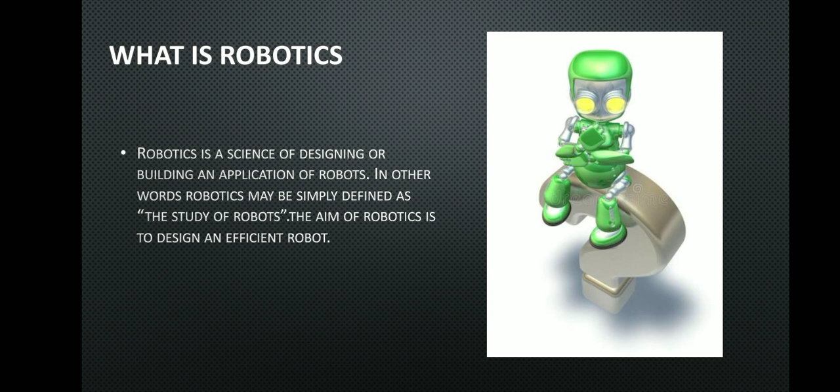Let us see the next topic: introduction to robotics. Nowadays, robots have become a subject of great interest. In fact, robots are defined as man-made mechanical devices. In our imagination, a robot is a machine that looks and acts like a human being. Robots can move and do anything like us, and this activity should be controlled and monitored by us, and the behaviors can be influenced into robots by programming, where the commands or tasks we want done are programmed into a robot.

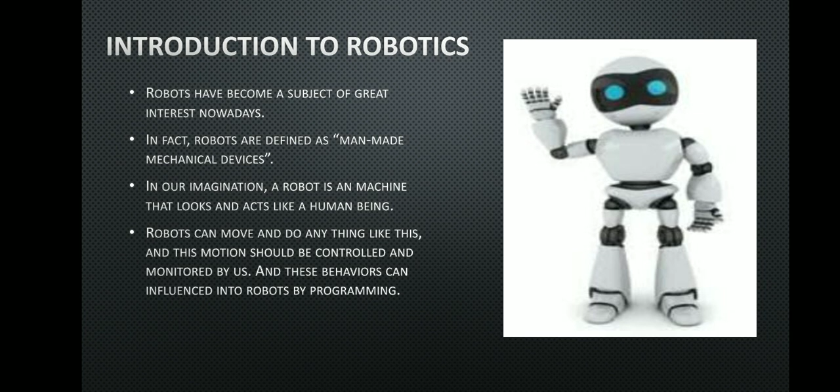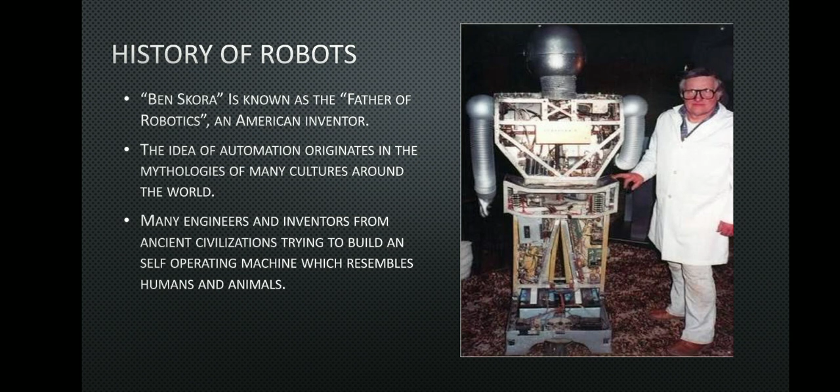Let me move on to the next topic, history of robots. Ben Skora, an American inventor, is known as the father of robotics. The idea of automation originates in the mythologies of many cultures around the world. From ancient times itself, many engineers and inventors have tried to build a self-operating machine, known as a robot, which would resemble a human or animal. I have attached the image of Ben Skora with his invented robot.

The word was first pronounced as 'robot', and then in the late 50s it softened with a U and was pronounced 'robut'. In the 60s it softened with an O and was pronounced 'roboht', and then in the 70s it was once again pronounced as 'robut'.

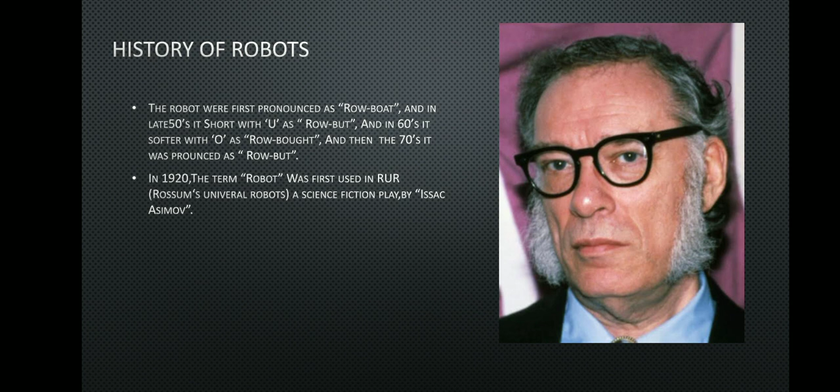In the year 1920, the term robot was first used in RUR, Rossum's Universal Robots, a science fiction play. It was first termed by an inventor called Isaac Asimov — Mr. Isaac Asimov, who coined the word robot.

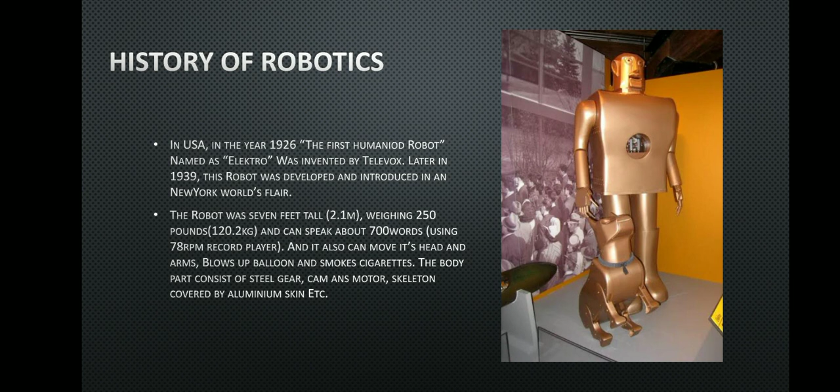In the year 1926, the first humanoid robot, named Elektro, was invented by Televox. Later, in 1939, this robot was developed and introduced at the New York World's Fair. The robot was 7 feet tall — that is 2.1 meters — and weighed 250 pounds, about 120.2 kg, and could speak up to 700 words using a 78 RPM record player. It could also move its head and arms, rotating its head and moving its arms up and down, and it could blow up balloons and smoke cigarettes. Its body consisted of a steel gear, cam, and motor, and the skeleton was covered by an aluminum skin. This is the image of the robot Elektro.

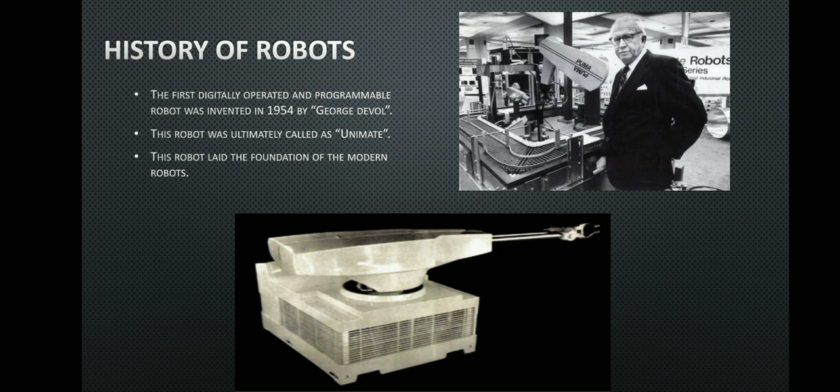The first digitally operated and programmable robot was invented in 1954 by George Devol. The robot was ultimately known as Unimate, named so because this robot laid the foundation for modern and future developing robots. This is Mr. George Devol with his invention named Unimate, and I have attached the image of Unimate separately here.

Moving on to the next topic, laws of robots. As humans, we have certain laws and regulations to be followed. Similarly, robots too have some laws, proposed by Isaac Asimov. As we said in the earlier slide, the term robot was introduced by Isaac Asimov — he is also the man who proposed the laws for robots.

The first law says a robot may not injure a human being or, through inaction, allow a human being to come to harm, unless this would violate a higher order law. The second law states that a robot must obey orders given to it by human beings, except where such orders would conflict with a higher order law. The third law states that a robot must protect its own existence, as long as such protection does not conflict with a higher order law.

After proposing these three laws, Isaac Asimov later added another law known as the zeroth law. The zeroth law states that a robot may not injure humanity or, through inaction, allow humanity to come to harm.

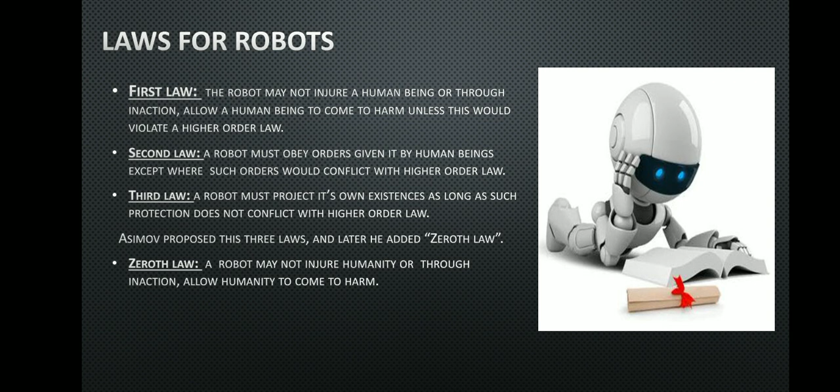Moving on to the next topic: is robotics necessary? Before getting into the topic, do you think that robots are necessary for us?

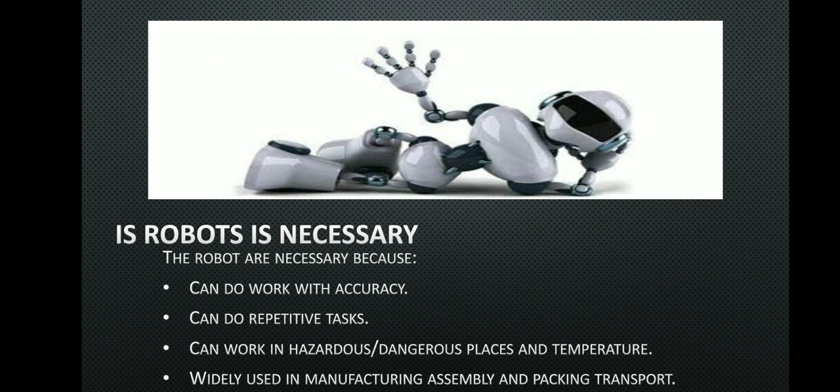Robots are necessary for us in many ways. Coming back to this topic, robots are necessary because they can do work with accuracy, they can do repetitive tasks, work in hazardous and dangerous places and temperatures where a human can't, and robots are widely used in manufacturing, assembly, and packing transport.

Moving on to the next slide. As I said in the previous topic, robots are necessary in many different ways. These different ways are taken as 5D considerations for robots: dangerous, dirty, dull, dexterous, domestic.

Let's first see dangerous: defusing bombs, mining, and space exploration. These are the places where robots are used, because if humans go there, there's no assurance for their lives.

And dirty: spraying paints and unblocking sewage and drainage pipes. Spraying toxic paints affects our skin and health, so robots can be used.

Dull: factory line work and heavy stocking jobs. If a man works more than 7 or 8 hours per day, he would become dull and can't work well. But if a robot does that, it works with the same speed and accuracy till the end without becoming tired.

Dexterous: surgical jobs and nanobots. This dexterous work should be done with a high level of accuracy where humans can't, so robots can be used in those places.

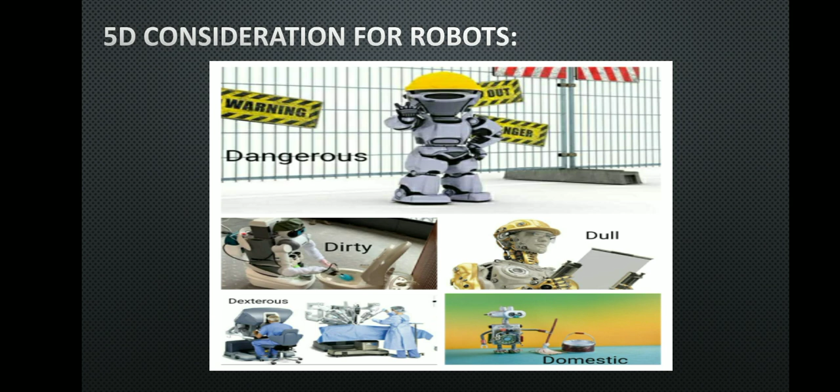And domestic: all household works come under the domestic category. In the next slide, you can see images for the previously discussed topic.

Moving on to the next topic, types of robots. Robots are of five types: pre-programmable robot, humanoid robot, autonomous robot, teleoperated robot, and augmenting robot.

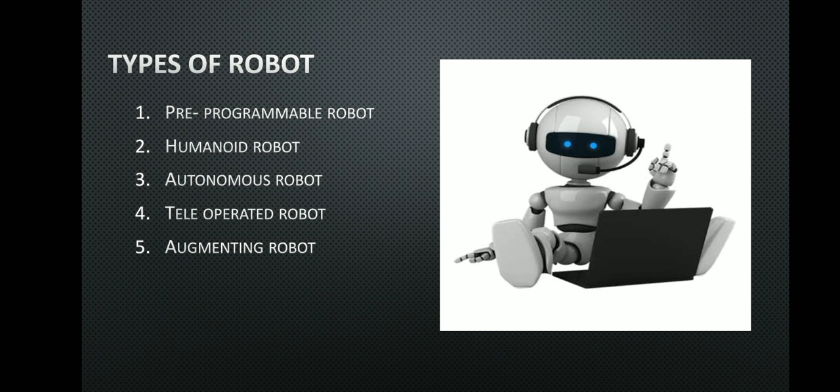Moving on to the next topic, applications of robots. Robots are used to work together in many fields like robotic painting, robotic welding, robotic assembly, part transfer, and machine tending, etc.

Robotic painting makes work easy for professional painters dealing with toxic materials, because it is very harmful to our skin and health, so robots can be used there.

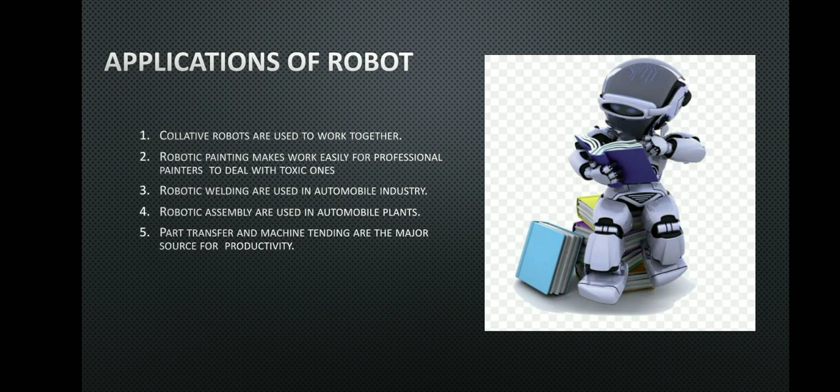Robotic welding is used in automobile industries, and robotic assembly is used in automobile plants. Part transfer and machine tending are major sources of productivity.

Let me move on to the next topic, advantages of robots. Robots are useful in many ways: safety, speed, perfection, etc. First, let us see about safety.

It's the most important advantage of utilizing robots, because robots will handle things very safely in their surroundings, etc.

Speed: robots do not get distracted and complete the work on or before the deadline. They do not get distracted or tired, and work with the same speed till the end, which is an advantage for a robot.

Then perfection: robots do the work with accuracy, at a high level where a human can't. Robots are known as happier employees in the sense that they need not worry about salary, do not get tired, and do not take breaks in between. They can work longer hours than humans without even taking breaks.

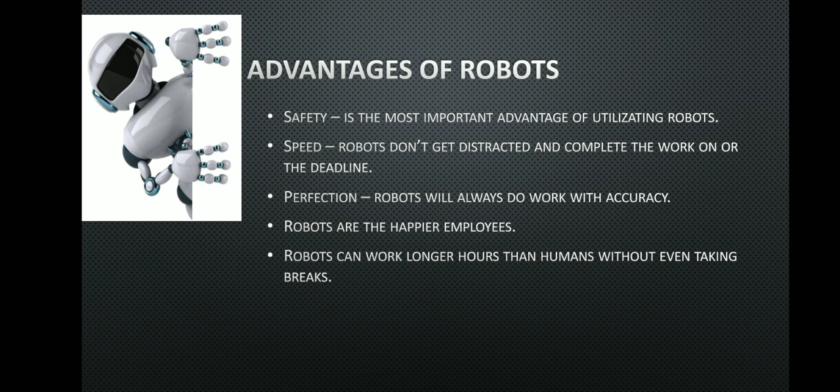So let me move on to the next topic, disadvantages of robots. Many people can lose their jobs in factories, etc. Robots need a supply of power, proper and regular maintenance to keep them in running condition, and the cost of a robot is high. These are the disadvantages of robots.

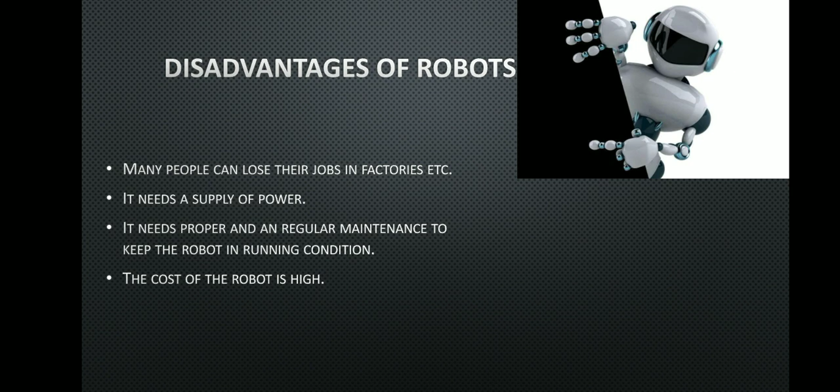Moving on to the next topic, the role of a mechanical engineer in robotics. As a mechanical engineer, I think they would work in a hardware component or something like that—mostly on hardware, designing the structure of a robot, joint mechanism, bearing, and heat transfer, designing the parts of a robot to do what you need the robots to do.

Next slide: a big part of this is to design for manufacturing. Designing robots for manufacturing is a big deal, so you would also handle strength and performance simulation, such as FEA, which means finite element analysis.

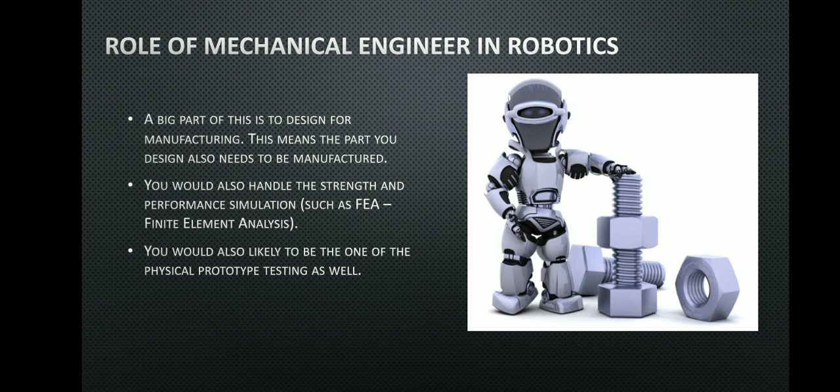You would also likely be involved in physical prototype testing, testing the physical hardware components for the robots to see whether they are suitable or not. So these are the roles of a mechanical engineer in robotics: to design the hardware components and similar tasks. Thank you for your patience.